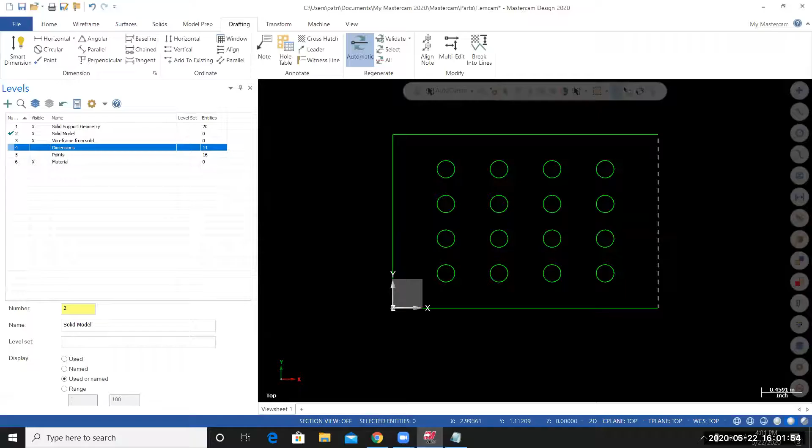From here, I'm going to verify that the dimensions are correct. I'll compare them to the blueprint. I can see that the numbers match.

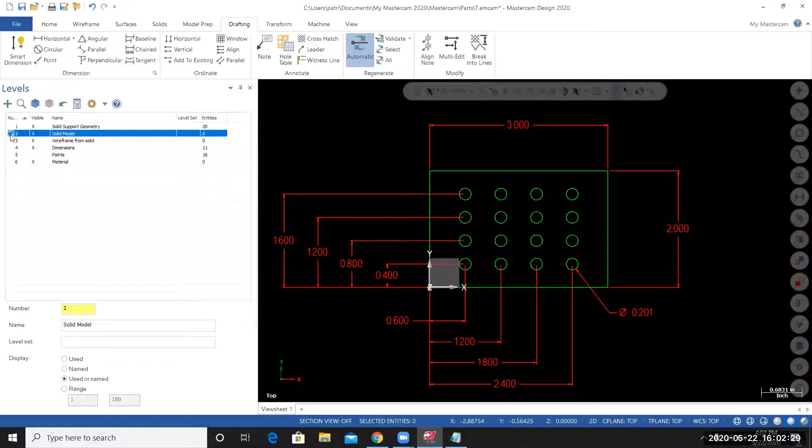So I no longer need to see my dimensions. I'll turn the dimensions off, or I'll set the dimensions level to invisible. Before I can do that, I need to make a different level active. I'm going to come to my level manager, click next to the number for the solid model level. That is now the active level. I can toggle off the visibility for the dimensions level.

Something else I'll do, I'm going to turn off my triads. So if I go to view and select show gnomons, that will hide my X, Y, and Z axis.

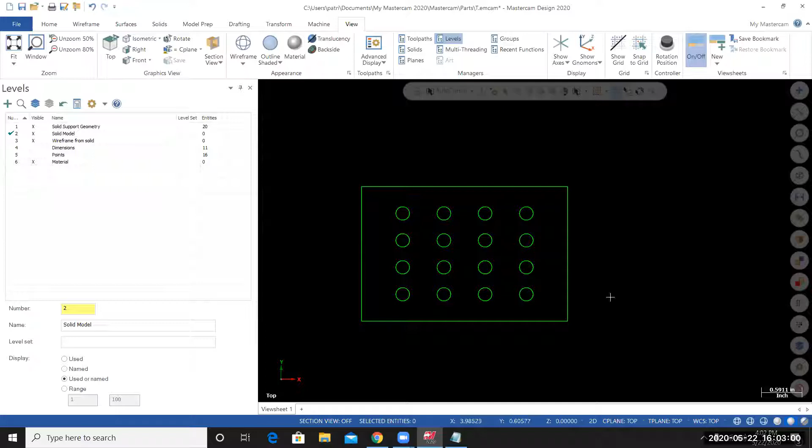The next thing I'm going to do is I'm going to create a solid model from this 2D geometry. Before I do that, I'm going to look at it from an isometric view. Right click on my screen, select isometric. We'll start by extruding the outside profile 0.188 in the Z. I'll come up to the solids tab. I'll use the extrude tool.

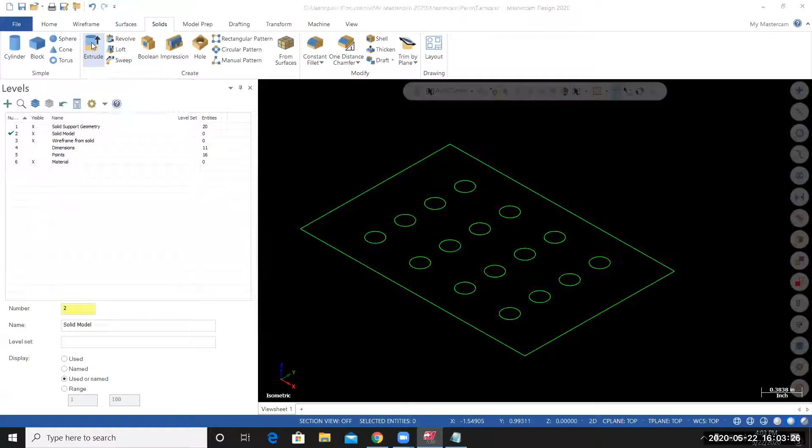The chaining dialog box appears. I'll select one of the outside edges of the rectangular shape. The entire profile becomes selected. From here, I'll select OK. And you can see the default extrusion length and direction. I'll set the distance to the part thickness, 0.188.

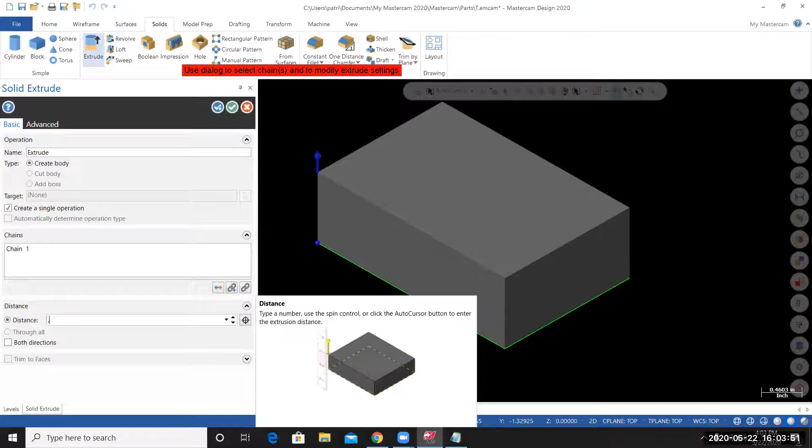And I'm going to extrude this in a direction that keeps the origin at the top of the part and keeps my construction geometry on the top of the part. So I'm going to use this icon, reverse all. You can now see that the extrusion is going in the negative direction and my construction geometry sits on top of my solid model. From here, I'll select OK and create new operation.

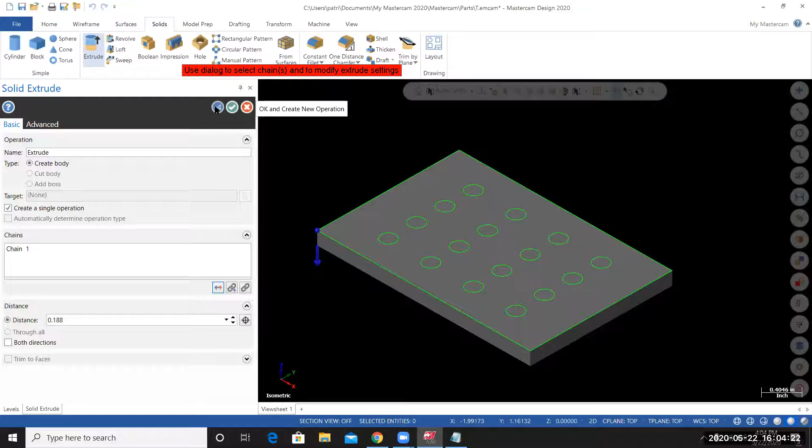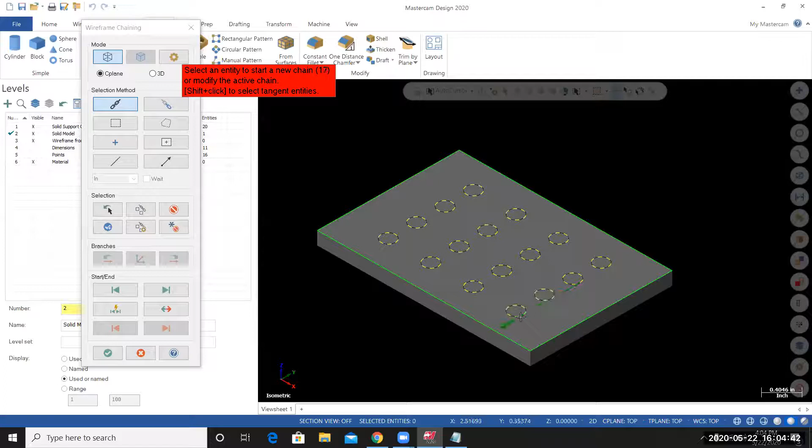That brings up the chaining dialog box. This time I'm going to select all of the circle geometry. I can select each individual circle. Here I'll select OK. You can see the extrusion arrow is now going in the negative direction. And this time, instead of create body, I'm going to use the cut body option.

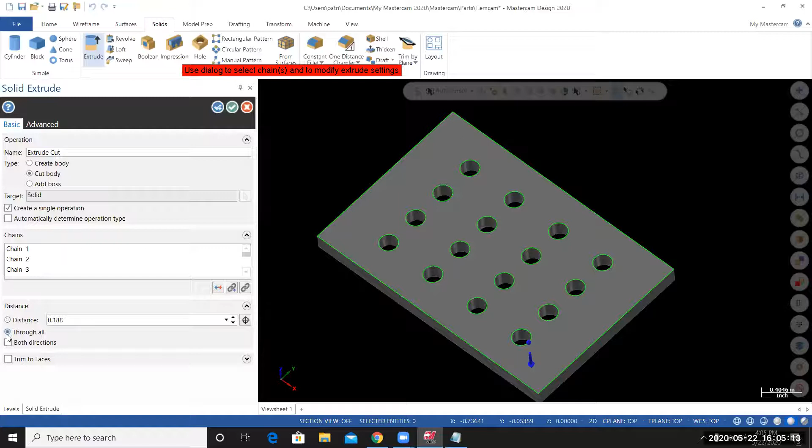I'll tumble my view. I can see that the holes are going all the way through. Something that I like to do, if the hole is supposed to go all the way through the part, I'm going to use the through all option. Tumble my view, make sure that the holes go all the way through the part. If everything looks good, I'll select OK.

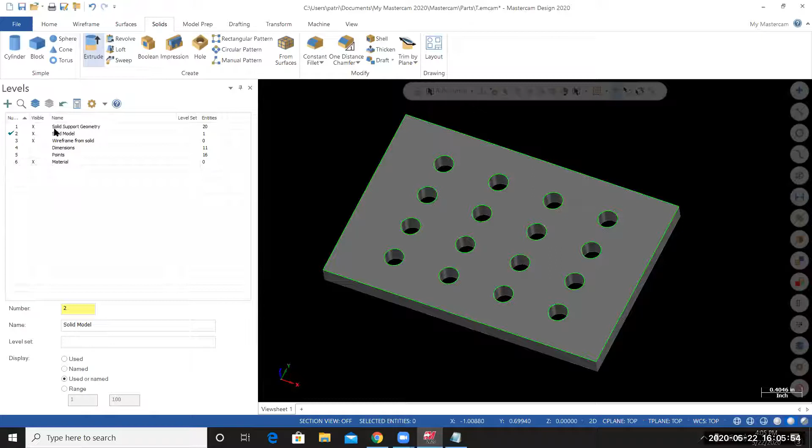From here, I'm going to turn off the solid support geometry level. Everything that's currently on this level was used to build this solid model. If I delete or alter any of the geometry that the solid model is dependent on, it's going to cause problems. When I go to save my file, it's going to corrupt the solid model. So what I like to do is to turn off the visibility of the solid support geometry level. I'm less likely to alter it or delete it when it's on an invisible level.

From here, I'm going to make the wireframe from solid level the active level. I'm going to create a wireframe representation of my model based off of my solid part. I'll go to the Home tab. I'm going to change the wireframe color to something that I haven't used yet. I'll choose this color here.

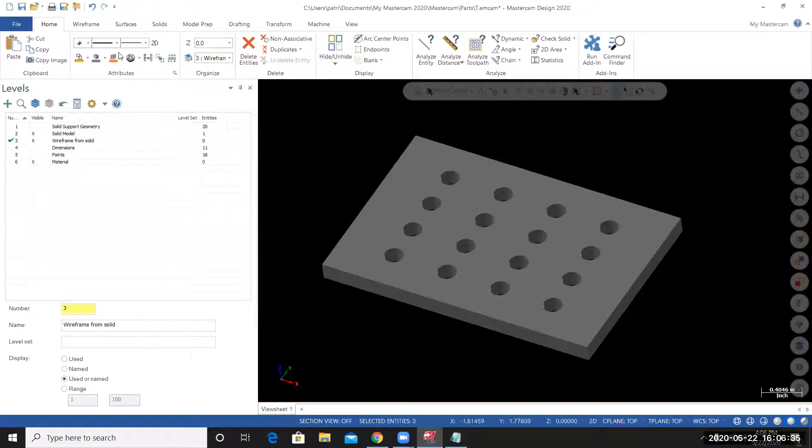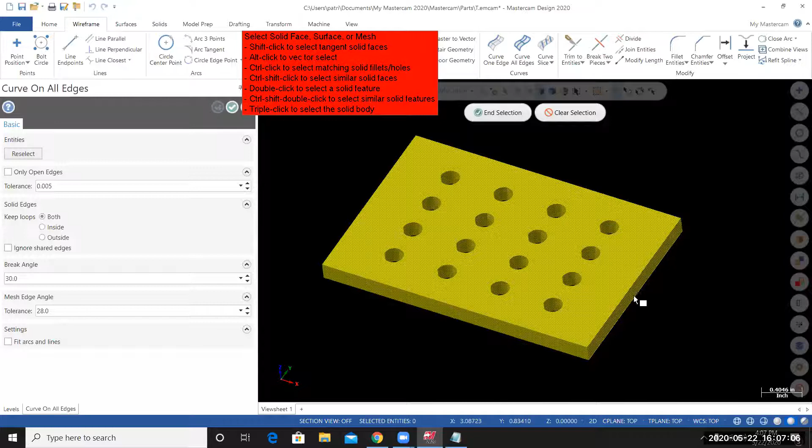To create curves on all edges, I'll go to the Wireframe tab. And in the Curves region, I'm going to use the Curve All Edges tool. Select Curve All Edges. Mastercam is prompting us to select the entity that we want to make the curves on. And I'm going to use the triple click to select the solid body method. So I'll triple click on my part. See the entire body change to the color yellow, indicating that it's selected. From here, I'll select End Selection.

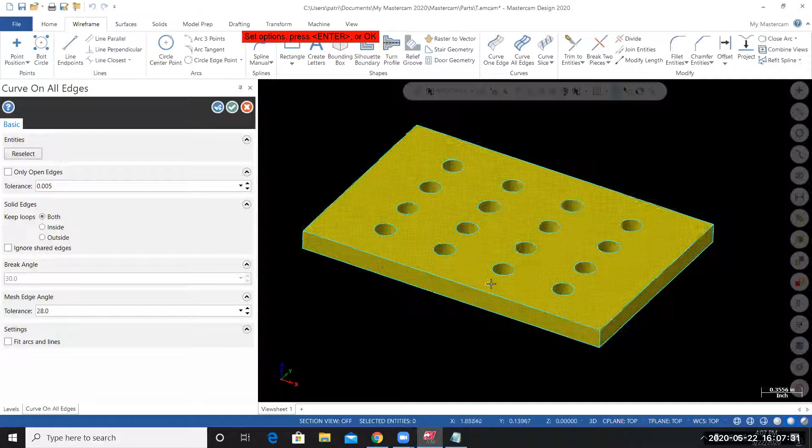Make sure that you are in a 3D construction plane. And then you'll see all the edges highlight. And what's happening is Mastercam is creating wireframe geometry, lines, circles, arcs, on all edges of our solid model. Everything looks good. I'll select OK. You can now see that there are 44 entities on the wireframe from solid level. If I turn off the visibility of the solid model level, you can see that I have a 3D representation of my part using wireframe geometry.